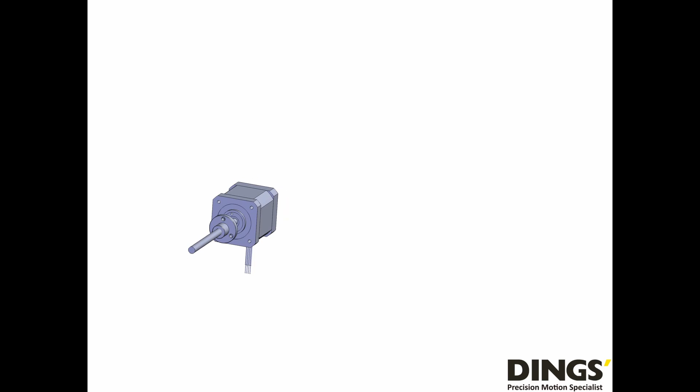From this online seminar tutorial, I'd like to introduce what is an external lead screw linear actuator and how to choose this product.

DINGS has four major form factors of lead screw linear actuators, and external lead screw linear actuator is the most popular product line. Let's take a look more about this product in details.

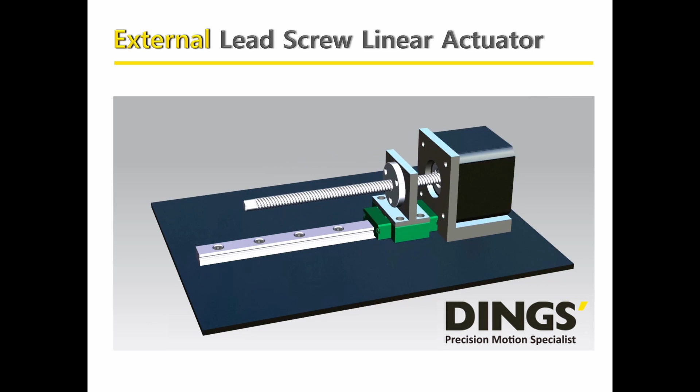From the engineering video in the next slide, I hope customers can understand how the external lead screw linear actuator works. It is mainly a 1.8 degree hybrid stepper that adopts a lead screw to become an integrated linear solution, enabling the stepper's rotary motion to transform into linear movement. With the use of a lead screw and engineered thermoplastic nut, it allows linear actuators to provide quiet, efficient, durable, and cost-effective linear motion solutions.

Screw end should be fixed. Also, motor and nut should be fixed and well aligned with the mechanical structure, since it impacts performance like thrust force, linearity, runout, and also the life cycle of an actuator.

DINGS external lead screw linear actuator comes in 8 different sizes ranging from a square frame of 14mm to 86mm, or NEMA size from 6 to 34. This includes NEMA size 6, size 8, size 11, size 14, size 17, size 23, size 24, and size 34.

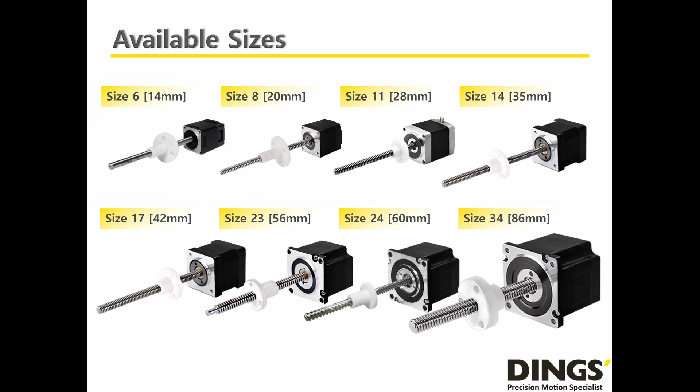Here are general specifications of DINGS external lead screw linear actuator. DINGS uses a 303 stainless precision cold rolled lead screw, and for certain applications, customers can choose Teflon-coated screw as an option. Screw accuracy and straightness is 0.18mm and 0.15mm respectively, based on 300mm lengths. Screw efficiency ranges from 35 to 85%, depending on the pitch of the lead screw.

Please carefully operate DINGS external lead screw linear actuator following the temperature guideline in operation and storage. General screw backlash is 0.02mm and the engineering plastic nut is POM or PBT with self-lubrication. Typically, DINGS guarantees a few million cycles of life, but please don't forget it depends on the load, speed, and operation environment.

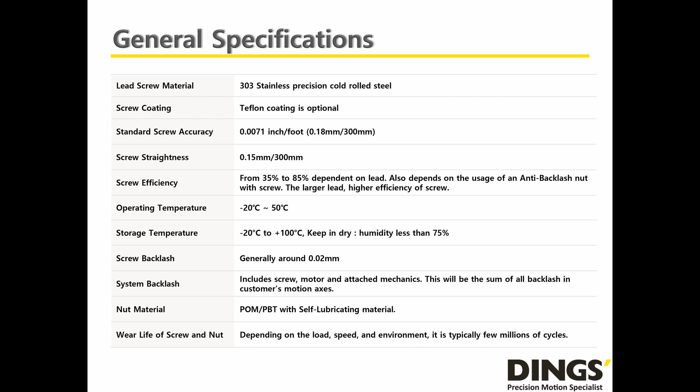Many customers ask DINGS what is the maximum length of a screw DINGS can adopt for an external lead screw linear actuator, and surely it depends on the size of the motor. As you see in this table, for small steppers like NEMA 6, 8, and 11, DINGS can maximize the screw length up to 250mm, and for NEMA 14 and 17, up to 350mm. For NEMA 23, 24, and 34, it can go up to 1000mm.

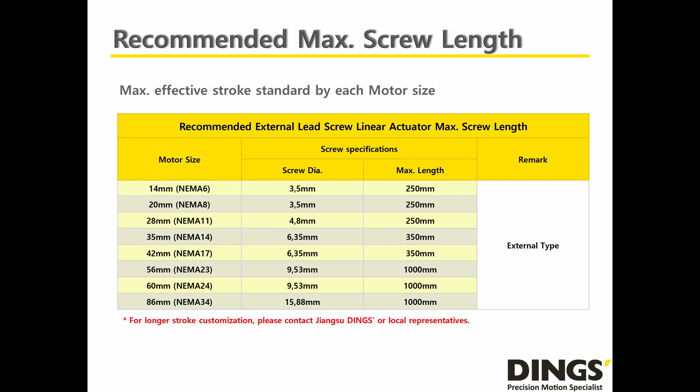If there is any special customization required from a customer for making a longer stroke, please individually contact DINGS or our regional local distributors.

DINGS external lead screw linear actuator's standard nut material is POM, acetal-based polyoxymethylene, or PBT, polybutylene. Many of our customers question the strength of the engineering plastic nut compared to a metal nut, but DINGS standard plastic nut is very strong enough and also more flexible in terms of lubrication capability. Please check more information on the nut in this table.

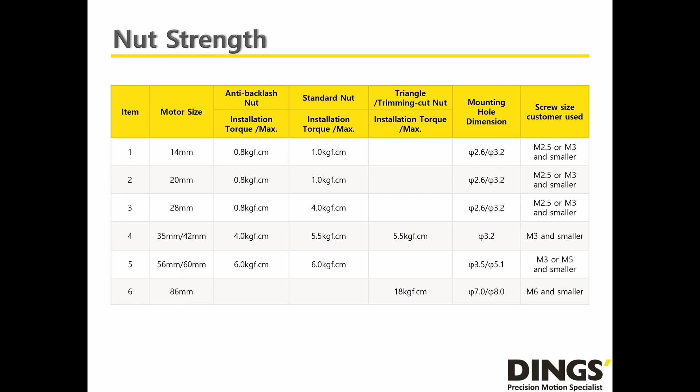I hope now you have a better understanding of an external lead screw linear actuator, and let me tell you more about the customization options DINGS can offer you.

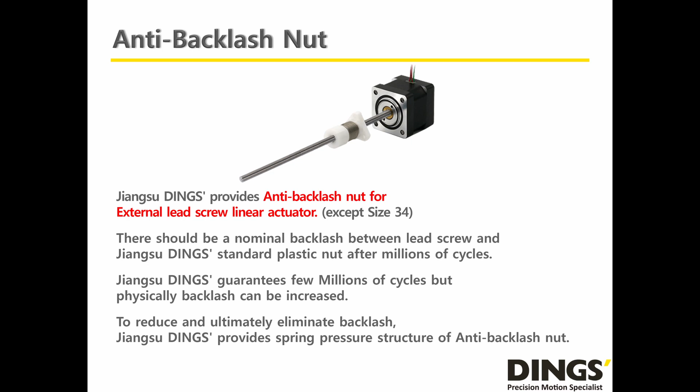DINGS provides an anti-backlash nut for stepper sizes except size 34. If a customer is concerned about mechanical backlash between nut and screw after millions of cycles, the customer can choose a spring pressured structure of anti-backlash nut as an option.

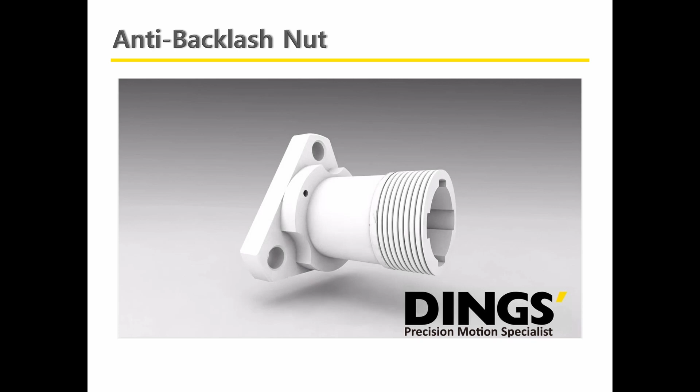From this engineering video, customers can understand how DINGS anti-backlash nut works. Usually there is a self-locking force between screw and nut if the screw pitch is very fine, but if the pitch gets bigger, there can be backlash between screw and nut. A 180-degree twisted spring pressured anti-backlash nut can compensate or correct the backlash due to higher compression from the spring.

DINGS provides a wide range of encoder options for the external lead screw linear actuator. If the customer wants, DINGS is able to make the external lead screw linear actuator encoder-ready, meaning there can be a rear shaft and encoder mounting holes according to customer's requirements. DINGS also freely allows the customer to choose an encoder according to their mechanical size, the way of signal output, and resolution. DINGS offers a total of 6 different kinds of encoders. Please visit our website and freely choose your encoder option.

DINGS offers a common purpose power-off brake for external lead screw linear actuator, especially for motor sizes NEMA 14, 17, 23, 24, and 34. For vertical applications or holding motors from sudden power-off status, a brake is strongly required. All series of DINGS brakes are DC 24V based magnetic brakes, with a minimum of 2 million cycles guaranteed, under very low noise at 60 dB.

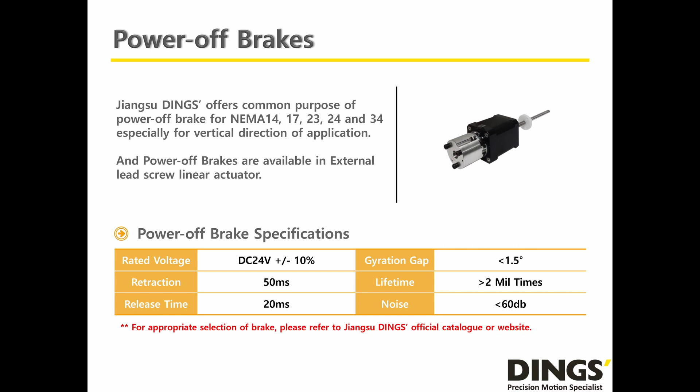Sometimes customers request a greaseless screw and nut combination for the external lead screw linear actuator, so DINGS offers a Teflon-coated lead screw. The Teflon-coated screw enables a longer life cycle and is very useful in unclean working environments with dirt, particles, or other contaminants, since it can be simply cleaned up.

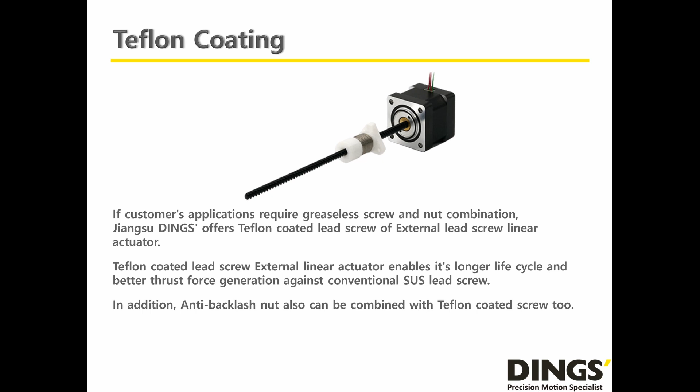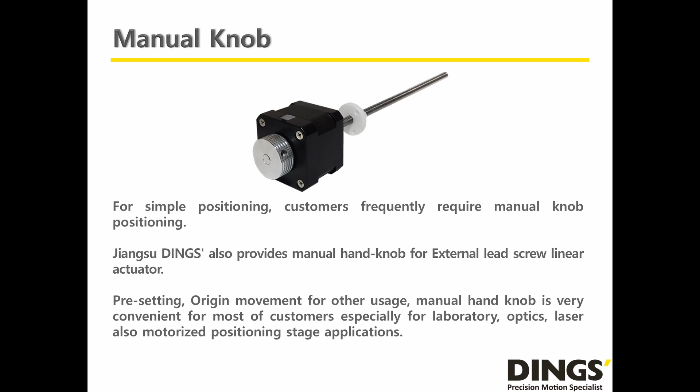For simple positioning, customers frequently require manual knob positioning. DINGS also provides a hand knob for external lead screw linear actuator, presetting, origin movement, and other usage. Manual knob is very convenient for most customers, especially for laboratory, optics, laser, and motorized positioning stage applications.

DINGS offers IP54 coated motor solution, epoxy resin primer coating, and a blue color polyurethane finishing of 0.1 to 0.15 mm thickness. The coated surface can withstand the salt spray test up to a maximum of 48 hours. For wiring connections, DINGS uses industrial metal connectors.

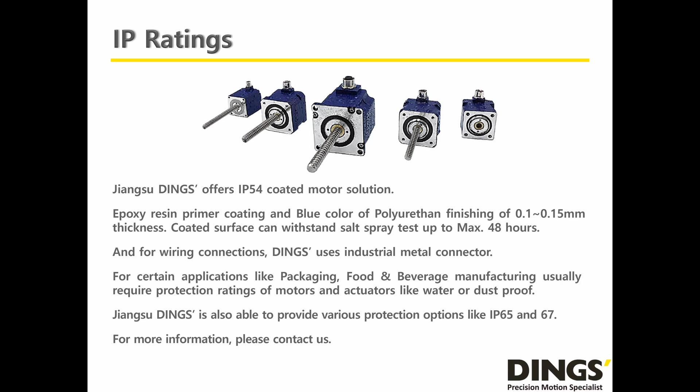For certain applications like packaging, food and beverage manufacturing, usually require protection ratings of motors and actuators like water or dustproof. DINGS is also able to provide various protection options like IP65 and IP67. For more information, please contact DINGS or local distributors.

Based on basic understanding of DINGS external lead screw linear actuator, let's try to choose the actuator together. However, there are still a couple of things I have to highlight for an appropriate product selection. Let's take a look at a few more steps for actual product selection.

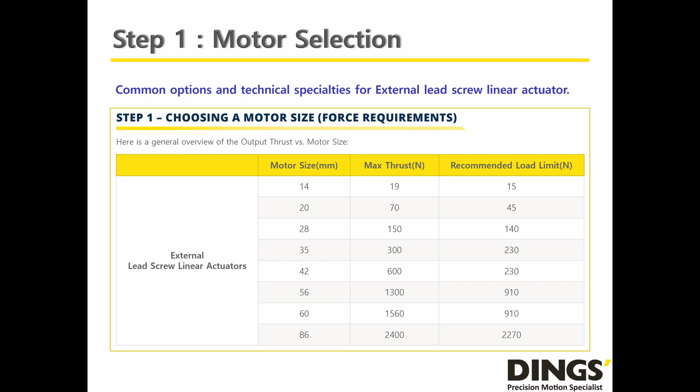It is a very basic step, but still many customers are not clear on this. According to DINGS technical guideline for external lead screw linear actuator, for thrust force, maximum and recommended, please choose a proper motor size in advance. This is the first step to choose an actuator.

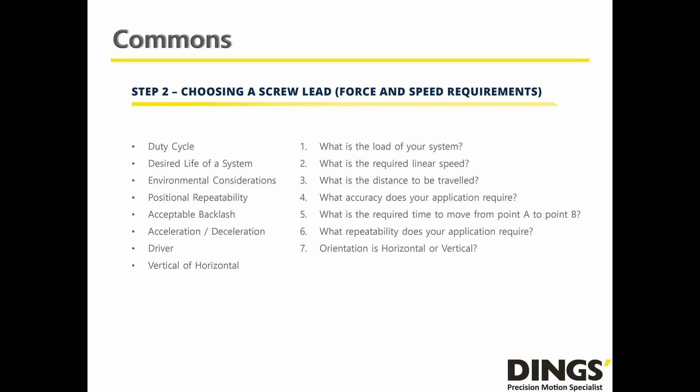As you select the size of motor, now it's time to choose a lead screw. It is actually about force and speed requirements. As you can see, there are many technical factors customers have to deeply consider and calculate. But if there is any question, please feel free to contact DINGS or our local distributors.

According to your application or concept of design, you can simply find out a proper lead screw between speed and thrust force relationship. Based on different motor size and stack, you can check out the thrust force curve and select a lead screw code. One thing I would like to emphasize: please consider taking a maximum 50% safety margin to choose a lead screw.

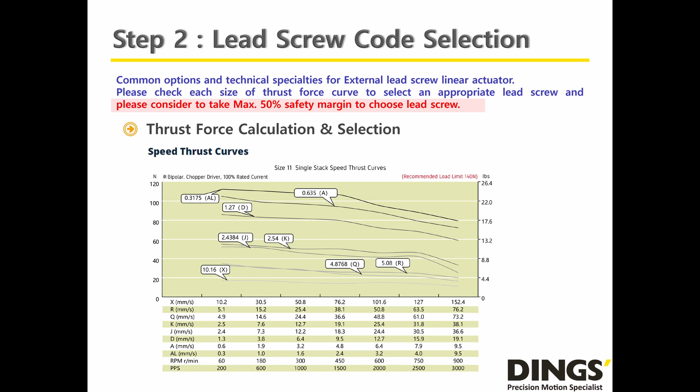It may give you a different lead screw, even a different motor selection from the beginning, but it is a very important step to select the right capacity of actuator with safety, so please be careful on this step.

DINGS external lead screw linear actuator's lead screw is a 303 stainless precision cold rolled lead screw. Screw accuracy and straightness are 0.18 mm and 0.15 mm respectively, based on 300 mm lengths. Screw efficiency is from 35 to 85%, depending on the pitch of the lead screw. DINGS controls all lead screw manufacturing processes in our facility.

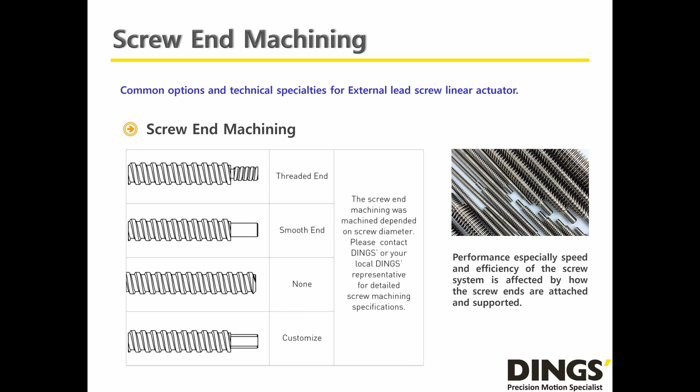If you completely choose a lead screw, please consider how to fix the screw into your mechanical structure. To guarantee best performance of an external lead screw linear actuator, the screw end should be properly fixed. To do this, please consider what kind of screw end machining option you are going to choose from our selection. If you want to specially customize end machining, please provide your request as a drawing, and our engineering team will immediately check and review to make it come through.

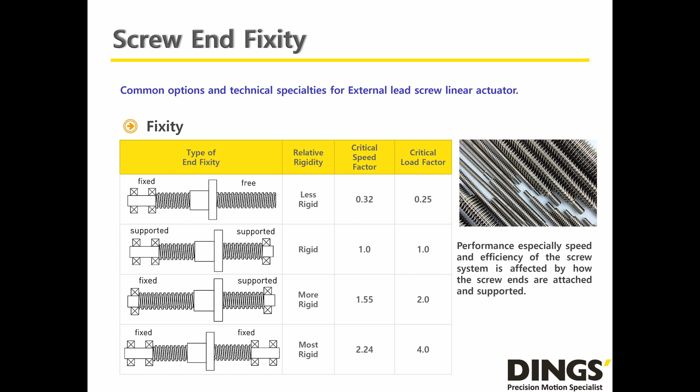Fixity of a screw end is a very critical factor customers have to consider, because as you can see in this table, different types of screw end fixity impact the rigidity of a customer's system. So if possible, please assemble the external lead screw linear actuator as strongly supported or fixed.

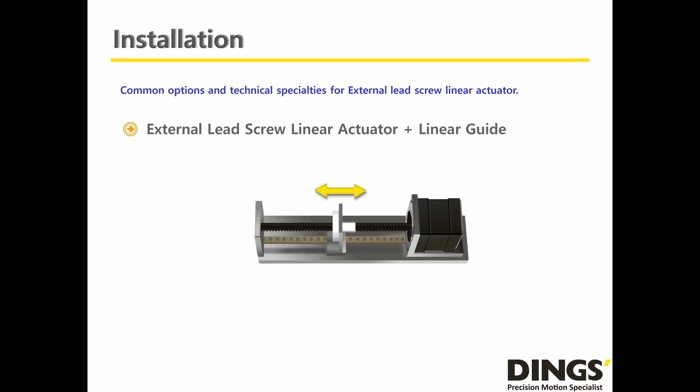External lead screw linear actuators can be installed with a linear guide or guide rod. Please follow DINGS technical guideline for better performance of external lead screw linear actuator.

DINGS website provides an online product selection tool for external lead screw linear actuator. Please watch the upcoming video, and it will help customers understand how to utilize the product configuration program.

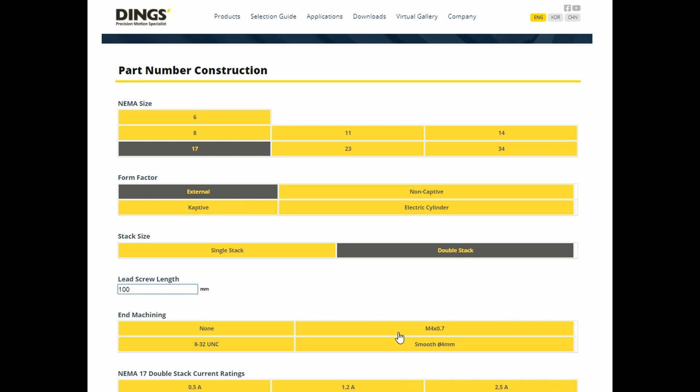NEMA 17 has single and double stack motor lengths, and let me try to select the double stack motor. You can freely write the screw length if it does not go over the maximum length, and here I write 100mm as an example. For screw end machining options, I choose metric end, but surely you can choose other options too.

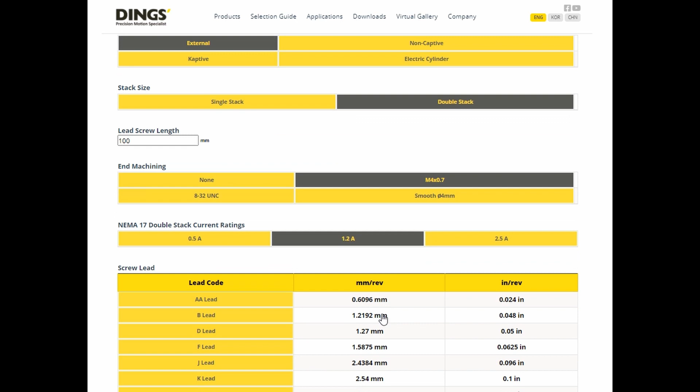NEMA 17 motor has 3 different windings: 0.5, 1.2, and 2.5 ampere. Let me click 1.2 ampere as an example. NEMA 17 motor has 11 different kinds of lead screws, and please choose whatever you want. But please remember 50% safety margin when you choose a lead screw from the thrust force curve.

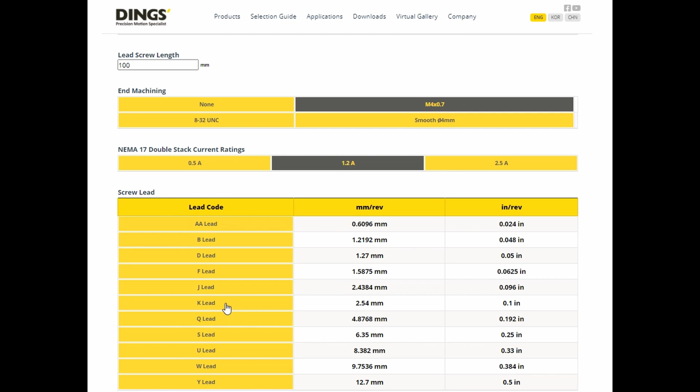From this program, I chose K-screw lead, and as an option, do you want to take an encoder? I'm saying yes, definitely I need it. Let me choose an encoder and resolution, also signal output and index or non-index. What about the screw? If you do need a Teflon coating screw, please click it, and also anti-backlash nut can be chosen too.

Then finally, you can bring out the part number and click the button. Your part number selection will be automatically emailed to the right person to contact you.